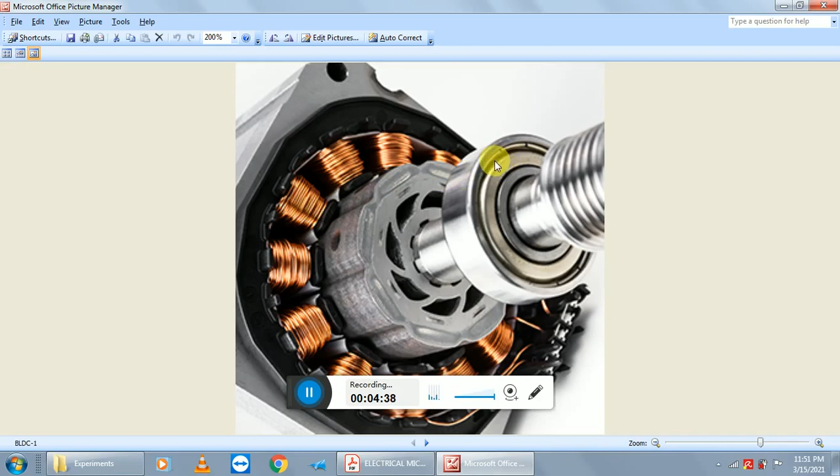Let's start with the simulation by using RMxprt. So minimize this and double click on ANSYS Electronics and wait. So this is our Maxwell. Click on Maxwell, select RMxprt, select brushless permanent magnet DC motor and make it okay. Next, check whether the machine is a BLDC motor or not. Go to RMxprt, check the machine type, select brushless permanent magnet DC motor and make it okay.

The next step is to explore the project manager and double click on machine. Here the machine type is brushless permanent magnet DC motor. Number of poles is 4. Rotor position: select inner rotor, and change the frictional loss to 12 watt, and windage loss is 1 watt, and set the reference speed to 1500 rpm, and control type is DC, and select the circuit type.

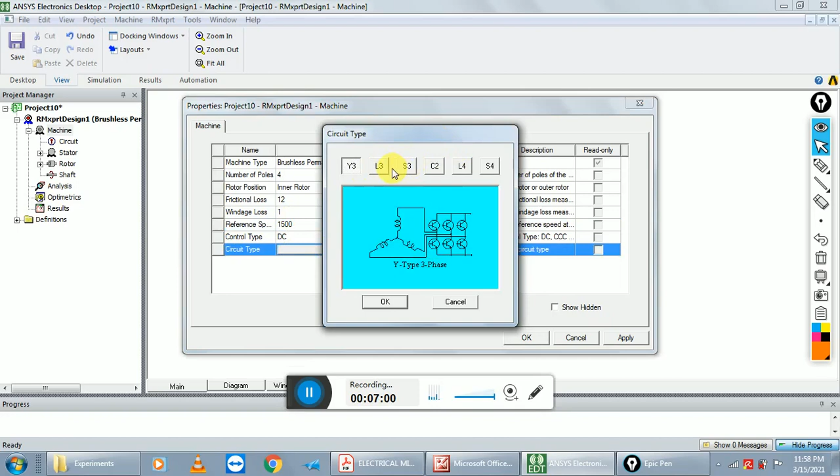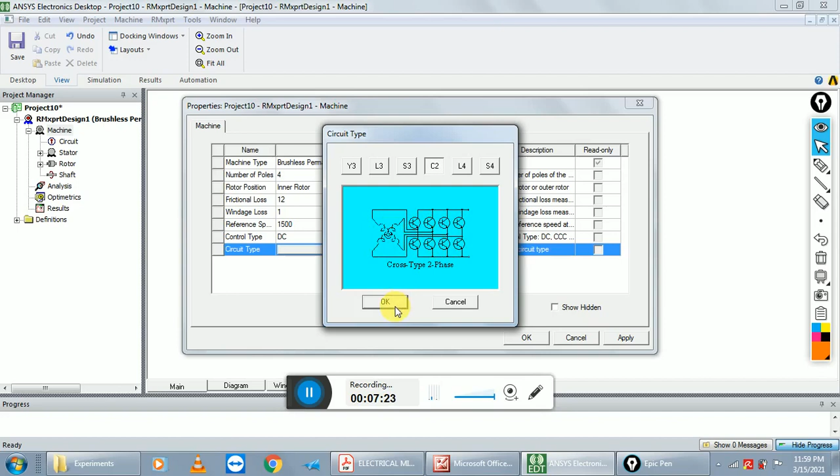Here are different circuit types: Y3, L3, S3, C2, L4 and S4. Select C2 type, and this is your C2 type circuit diagram. These are your switches, and this is your BLDC motor winding. Make it okay. Again click on OK. The next step is again go to project manager, and in project manager explore machine and double click on circuit.

Here the lead angle of trigger is 0 degrees, and trigger pulse width is 90, because here we selected circuit type C2, so trigger pulse width is 90. Select the transistor voltage drop, meaning your switch voltage drop is 2 volt across the switches, and diode voltage drop is also 2 volt, and click on OK. After the completion of this step, the next step is to create the dimensions of our stator body for the BLDC motor.

So go to project manager and explore stator, and first start with stator, then double click on stator and put the dimensions of stator. So outer dimensions for our stator body is 120 mm, and inner dia is 75 mm, and length of stator body is 65 mm, and stacking factor is by default selected 0.95.

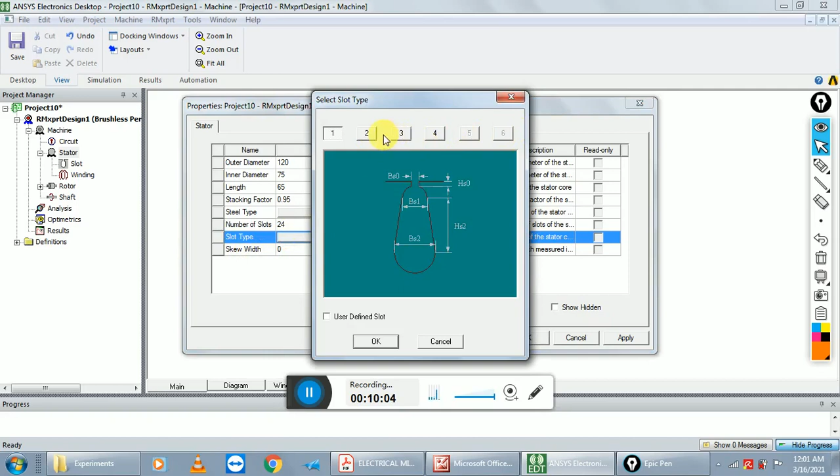Select steel type, click on steel type, and search here M19_24G. Select this material, and number of slots is 24, and select the slot type. Here are various types of slots, so here we choose the second type of slot. In the second type of slot we have dimensions BS0, HS0, HS1, BS1, BS2 and HS2.

These are dimensions. Click on OK, and click on skew width, 0, and click on OK. And this is your BLDC motor inner and outer dia. And next step is

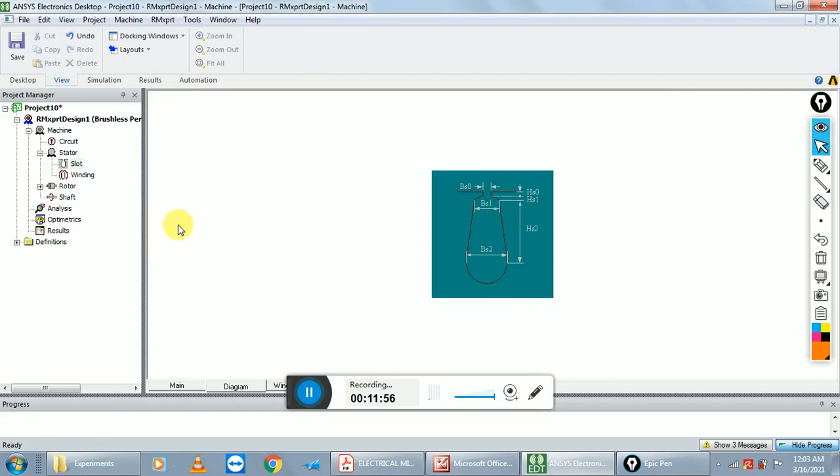explore stator and double click on slot, uncheck auto design, make it okay, and again go to stator, explore stator and double click on slot, and uncheck the parallel tooth, and HS0 is 0.5 and HS1 is 1 mm, HS2 is 8.2 and BS0 is 2.5 and BS1 is 5.6 and BS2 is 7.6. Click on OK. This is our stator for BLDC motor, and our slots are second type.

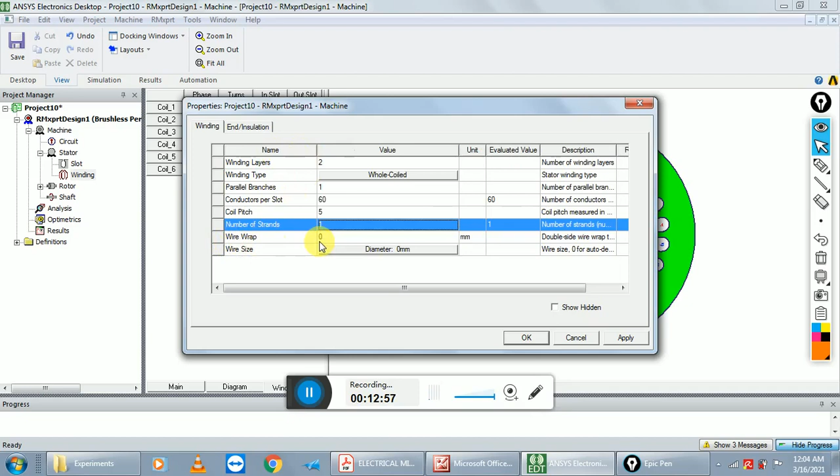Next step is in stator, double click on windings. So here select winding layer is 2 and winding type is whole coil, make it okay, and number of parallel branches is 1 and conductors per slot is 60 and coil pitch is 5 and number of strands is 1 and wire wrap is 0 and select wire size and diameters, unit is mm, wire gauge 0 and select gauge is auto, click on OK.

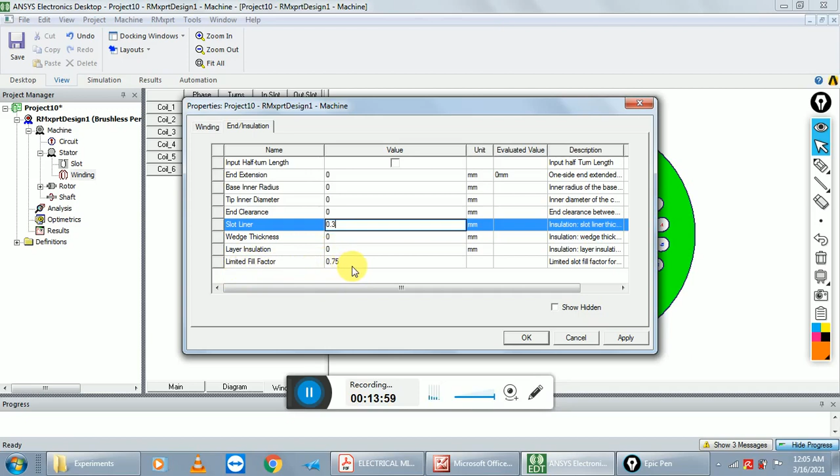And next step is select end insulation, and in end insulation uncheck input half turn length and end extension is 0 and base inner is also 0, tip inner is 0 and end clearance is 0 and slot liner is 0.3 and wedge thickness is 0 and layer insulation is 0 and limited fill factor is 0.75 and click on OK. So this is your winding.

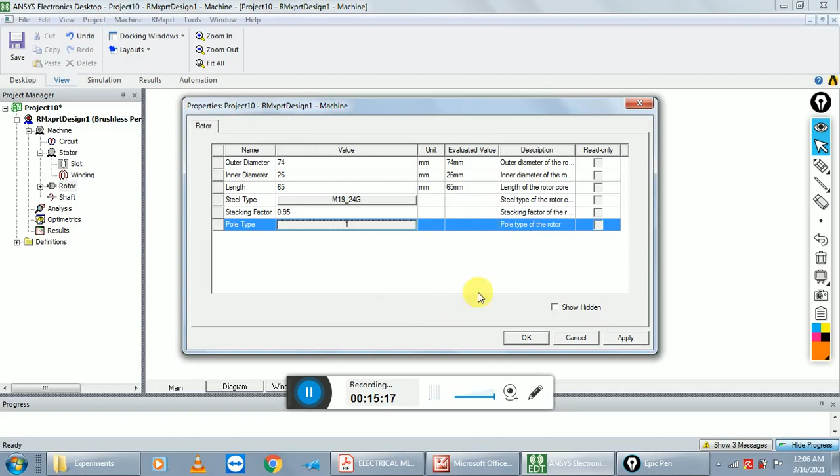Next step is again go to project manager and double click on rotor and fill the dimensions of rotor, select the outer dia is 74 and inner dia for rotor is 26 mm and length of rotor is same like the stator, 65, and select the steel type is again M19_24G. Search M19_24G, select this material and the stacking factor is again 0.95 and pole type, these are kinds of pole type, so here select pole type is 1, make it OK, again click on OK. This is your rotor body.

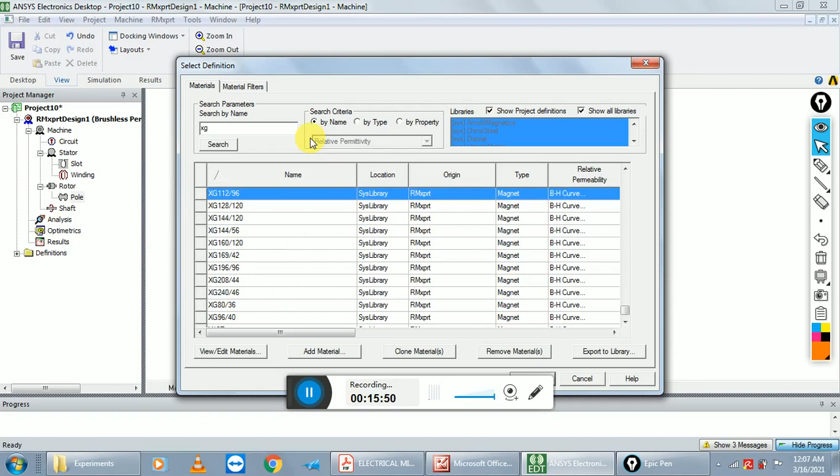Next step is explore rotor and double click on poles. In poles embrace is 0.7, offset is 0 and select the magnet type is XG196/96. Select this material and magnet thickness is 3.5 mm, and make it okay. This is a rotor body.

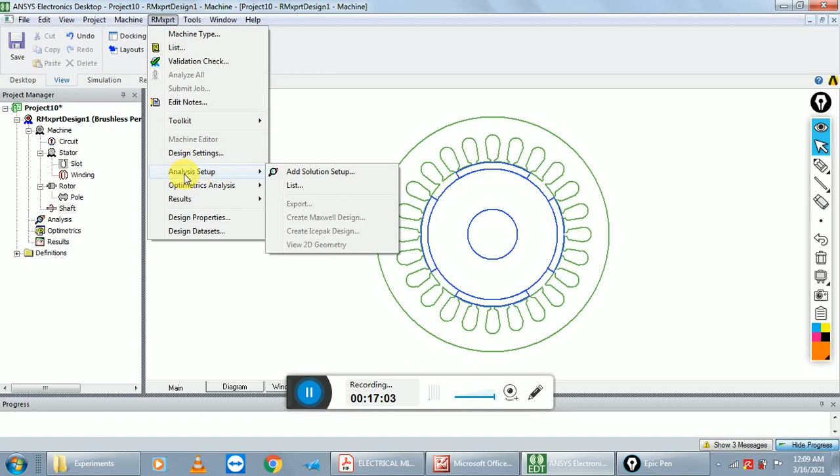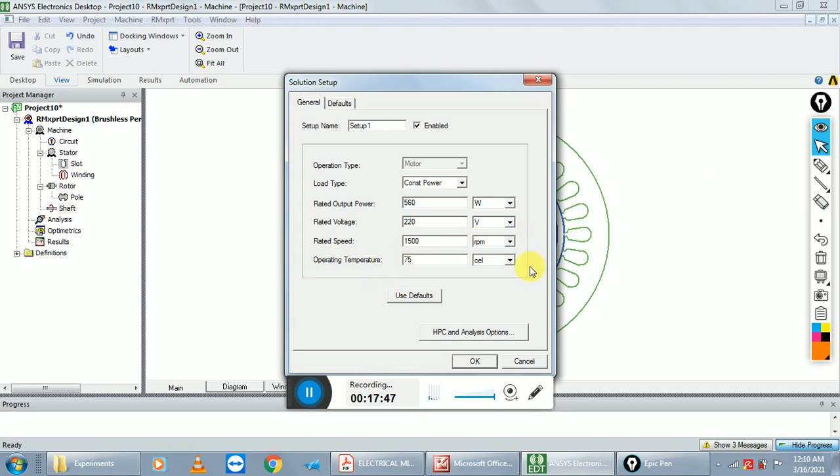Next step is double click on shaft and uncheck the magnetic shaft, make it okay. Next step is go to RMxprt and select analysis setup, explore analysis setup, click on add solution setup. This is your setup 1. Operation type is motor and setup 1 enabled, and load type is constant power, and rated output power is 560 watt, and the rated voltage for our BLDC motor is 220 volt, and rated speed is 1500 rpm, and operating temperature for our BLDC motor is 75 degrees Celsius, and click on OK.

And after the completion of this step, go to RMxprt and apply validation check. Okay, design setting is done, machine setting is done, analysis setup done, and optimetrics is done. So there is no error. Close. And next step is go to RMxprt and click on analyze all. Save the project name as BLDC and save. Here our model is ready to simulate. This is the process, and check the message.

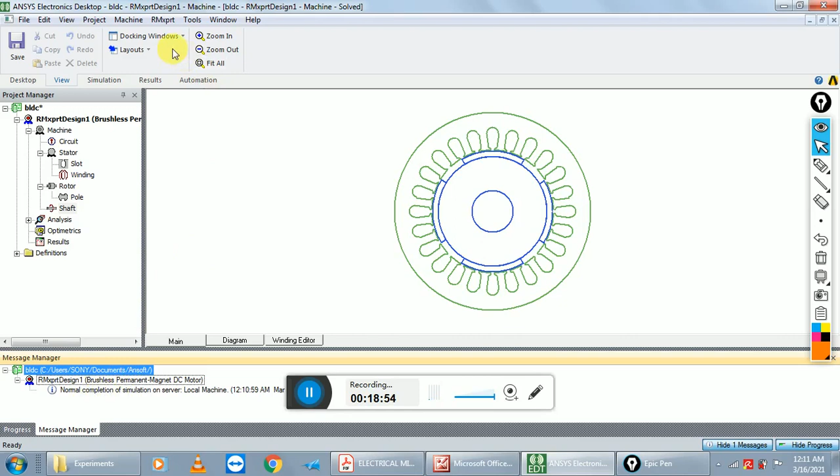Okay, normal completion. So next step is again go to menu and select RMxprt and search results, explore results, and click on solution data. This is your machine input data, and this is your design sheet for our BLDC motor, and this is a performance FEA input data, full load operation data.

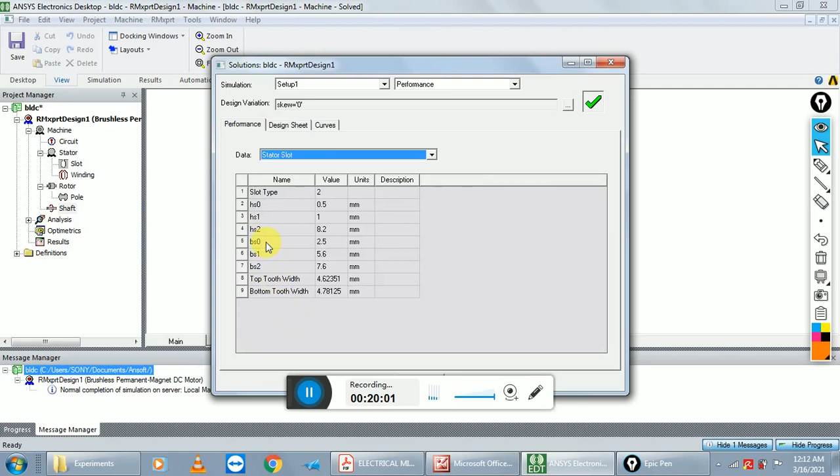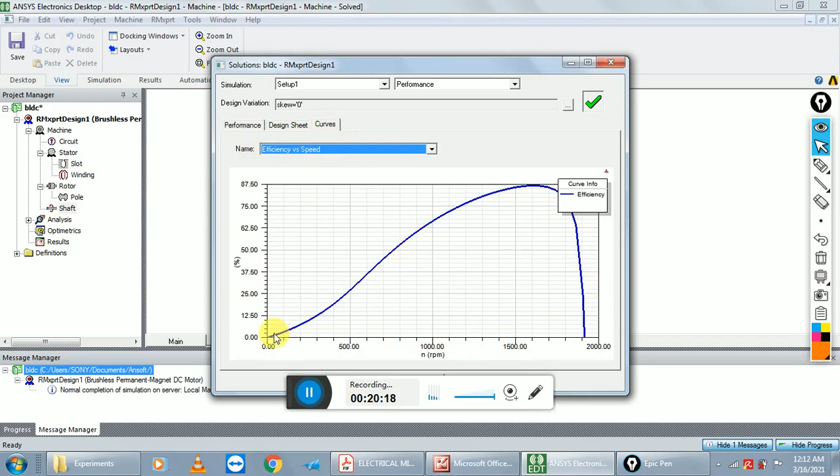Here average input current, you get all the data, armature thermal load, specific electric loading, armature current density, and frictional and windage losses, iron core losses, transistor losses, and diode losses, total losses. You check all the performances, and this is your curves between input DC current versus speed, efficiency of our DC motor. In this scale we have efficiency, in this scale we have RPM.

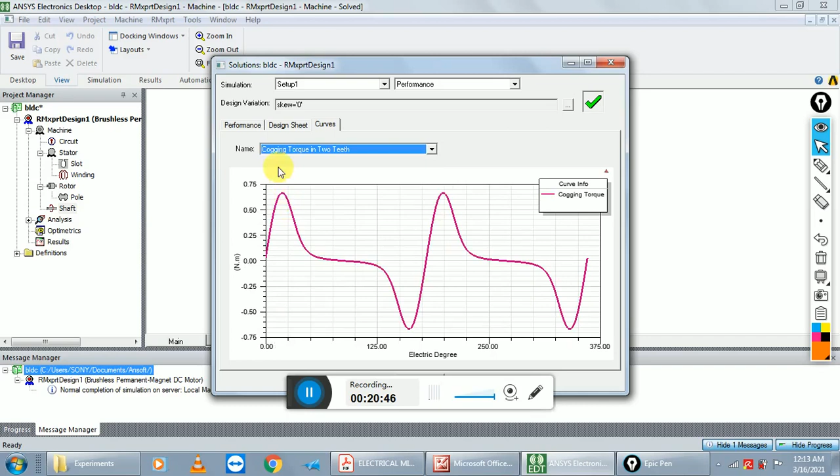This is your ratio of air gap torque to the DC current versus speed, and output power versus speed curve, and cogging torque, induced voltage in teeth, air gap flux density, all curves here.

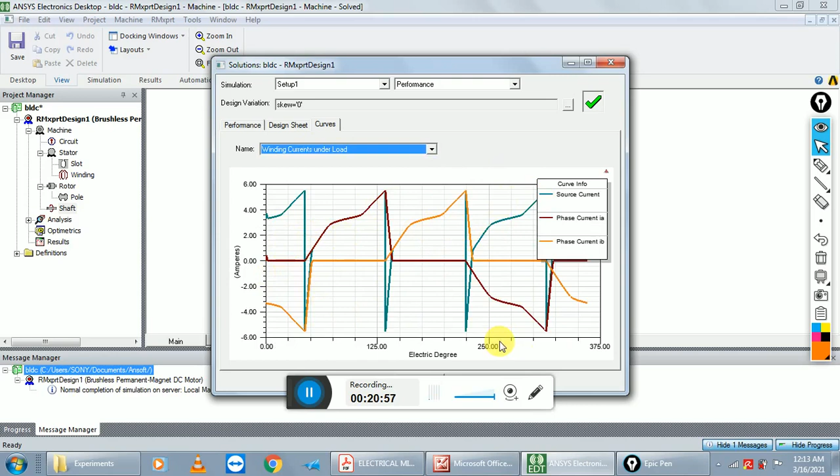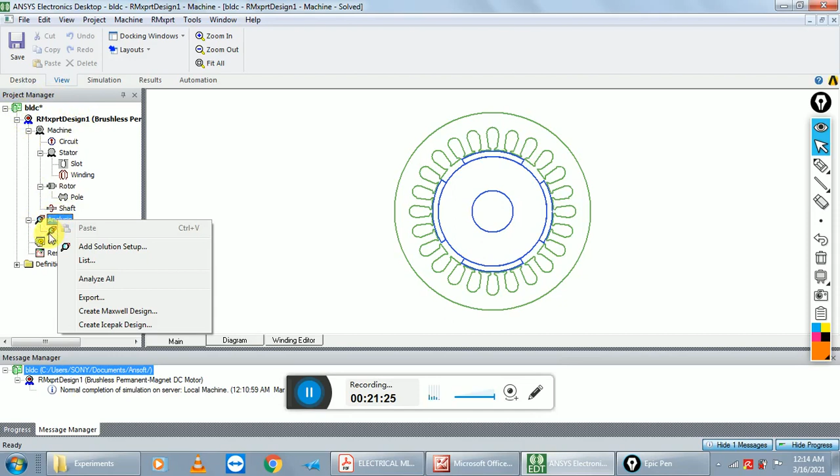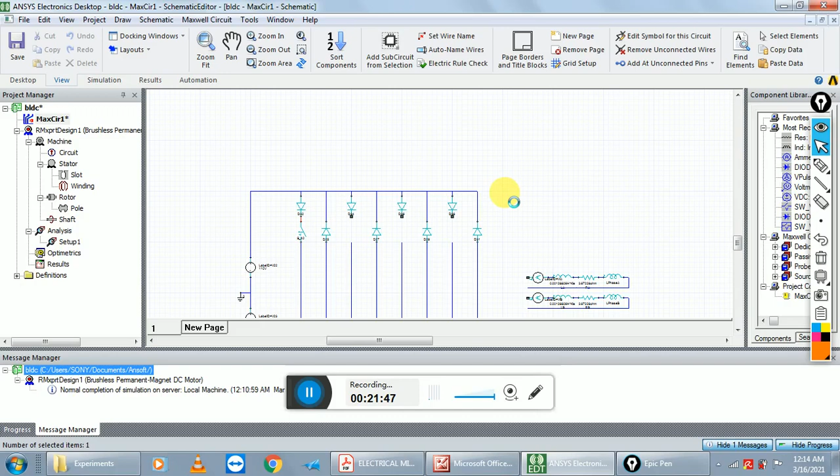So next step is same model. Here the BLDC motor is analyzed with RMxprt. Same model we analyze with Maxwell 2D. So here we convert the RMxprt model to the Maxwell 2D model. So go to your project manager and right click on analysis, click on create Maxwell design. Here type is Maxwell 2D design and solution is setup 1. Click on OK. So here your RMxprt design is converted to Maxwell 2D design. It takes a few minutes.

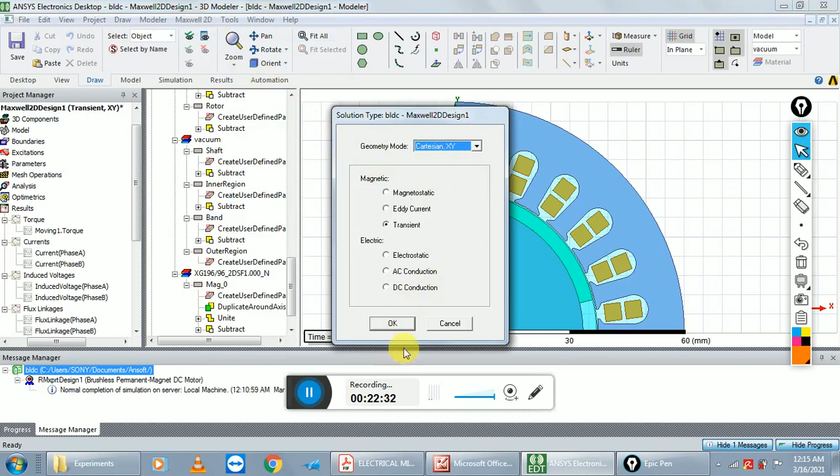This is your x-axis and y-axis. This is your XY plane. Okay, this is our Maxwell 2D design. This is your stator slot, and this is your conductors, and this is your rotor body. Okay, and next step is go to Maxwell 2D and click on solution type. Geometry mode is Cartesian XY, all correct. And after the completion of this step, go to your project manager and click on analysis, double click on setup 1.

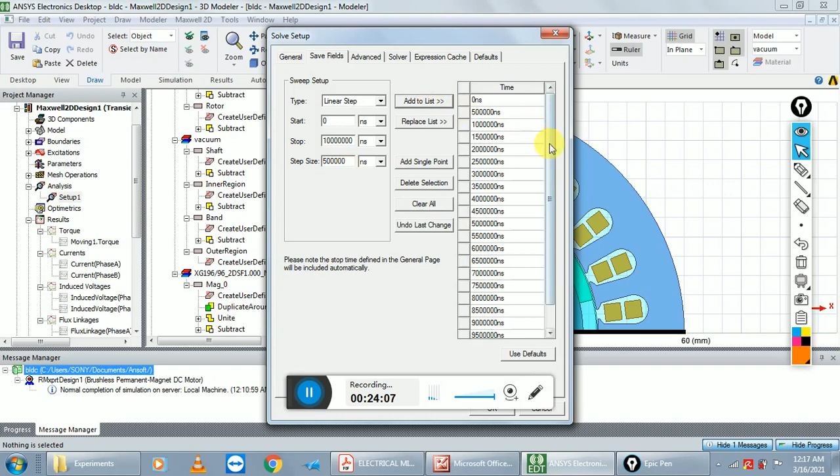Here in setup 1, go to save fields, and start time is 0 nanosecond and stop time is 10,000,000 nanosecond, and the step size is 500,000 nanosecond. Click on add to list. This is your step size.

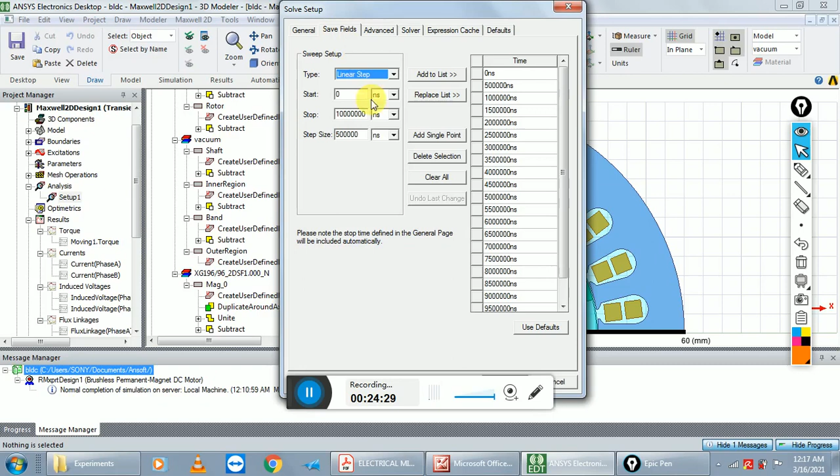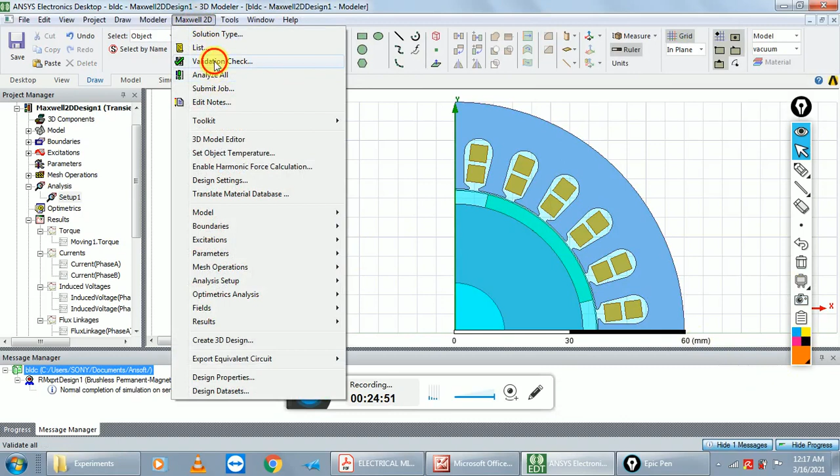Go to your solver, it's non-linear residual, and stop time is 0.4 second, and time step is 0.02. Click on OK, and next step is go to Maxwell 2D and apply validation check. Okay, some warnings in our boundary excitation, so I think it's not a very big issue. Again, go to Maxwell 2D and click on analyze all and wait for few minutes.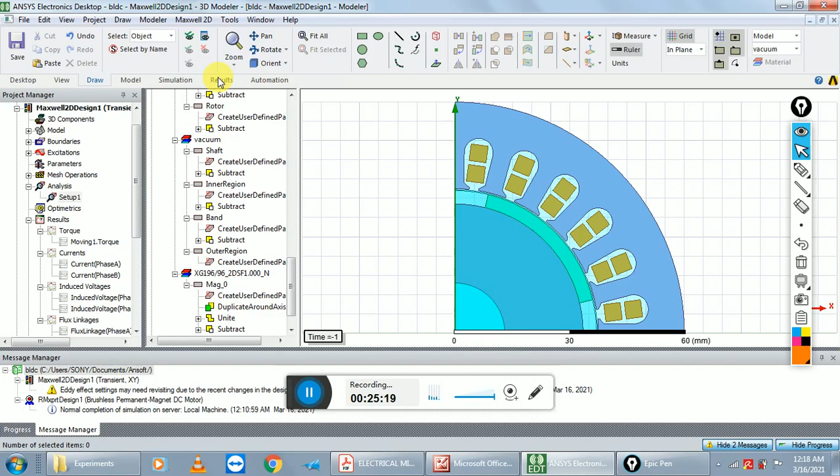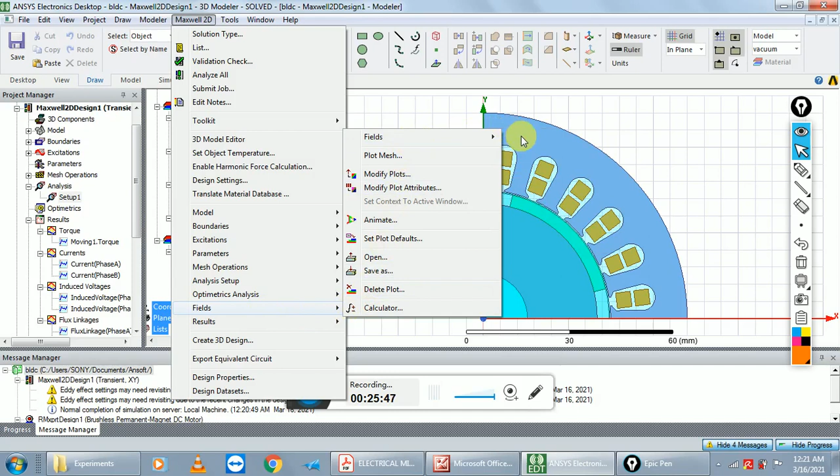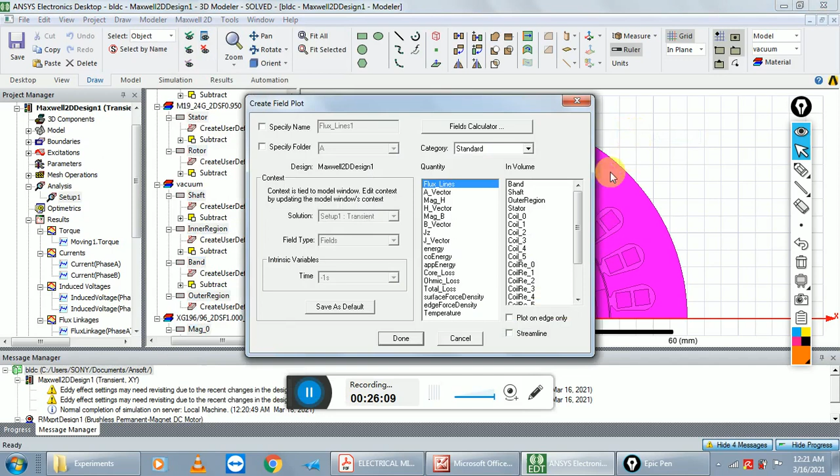Okay, our simulation is done on local server. So next step is to plot flux lines for this BLDC motor. Go to Maxwell 2D and click on fields, fields A and flux lines. So here first we select the geometry, go to edit and click on select all, and again go to Maxwell 2D and fields, fields A, select flux lines, select all objects, click on done. Okay, so here we don't get the flux lines.

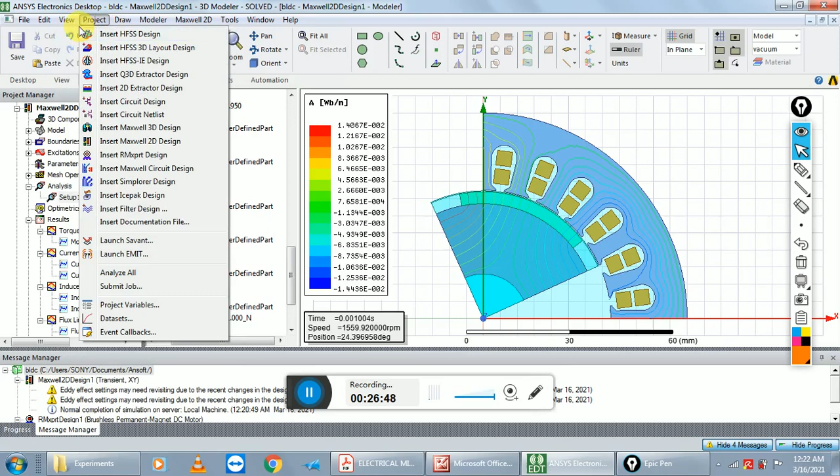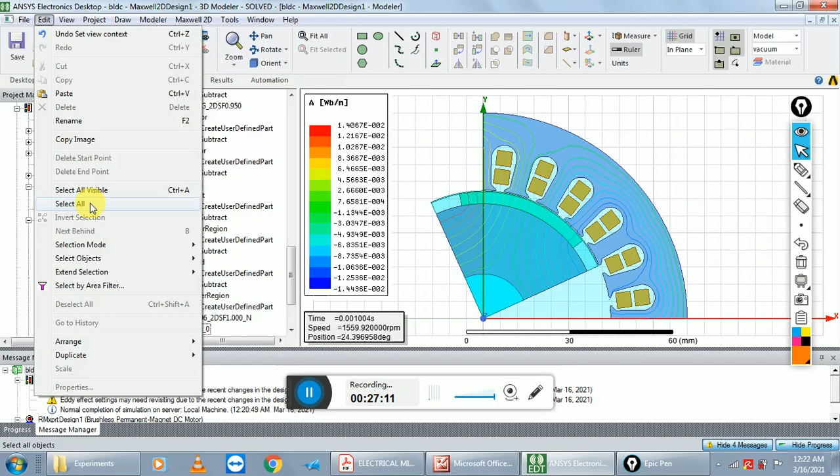Next step is go to view and click on set solution context, select some time here and click on OK. So this is your flux lines, and this is your flux lines intensity. Okay, next step is plot flux density. Again go to Maxwell 2D, fields and fields B magnitude. Same mistake, first go to edit and click on select all, and again go to Maxwell 2D, fields B and B magnitude, click on select all objects and done.

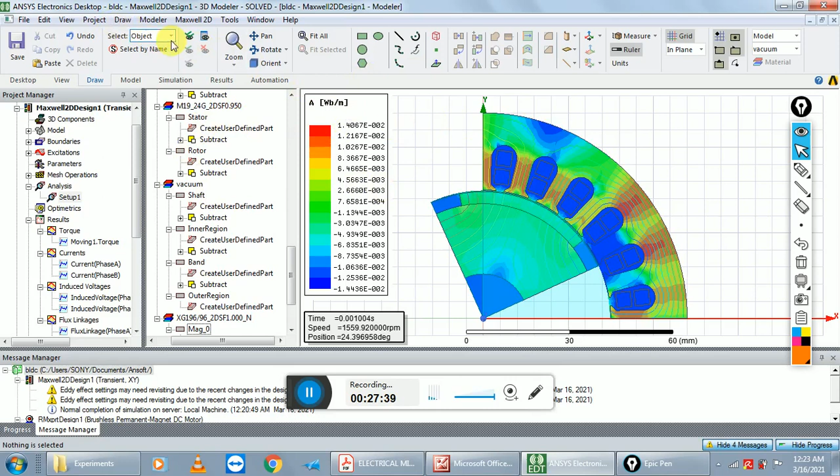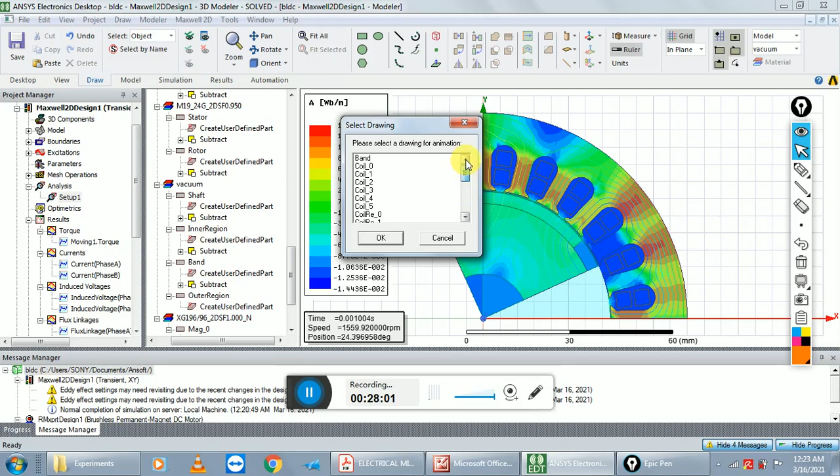Okay, so this is your flux density plot for BLDC motor, and put this model in animation mode. Go to view, click on animate and select drawing is rotor, click on OK, click on OK, and this is your animation mode. When our rotor moves, flux density changes in our rotor and stator body.